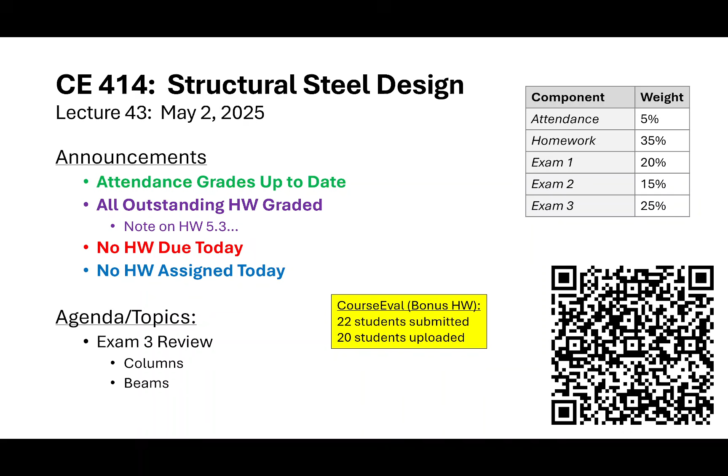Okay, so let's talk about the exam. You know how exam review works. I'm going to go through and talk about the format of the exam, what's going to be on it, and then the floor is yours for any Q&A you might have in getting ready for it.

So I don't have a whole lot to say that's different on logistics from our prior exams, because I want to make the point that this exam is not formatted really any differently than any of the others. In other words, just because I have a 2-hour time slot does not mean I made the exam a 2-hour exam, because I did not. It's really just another test. I have a very strong suspicion that an hour and a half in, most people will be gone.

That doesn't mean you have to be gone, you can stay the full 2 hours. But again, it's not intended to be a time-critical exam. You should have more than enough time to do the exam.

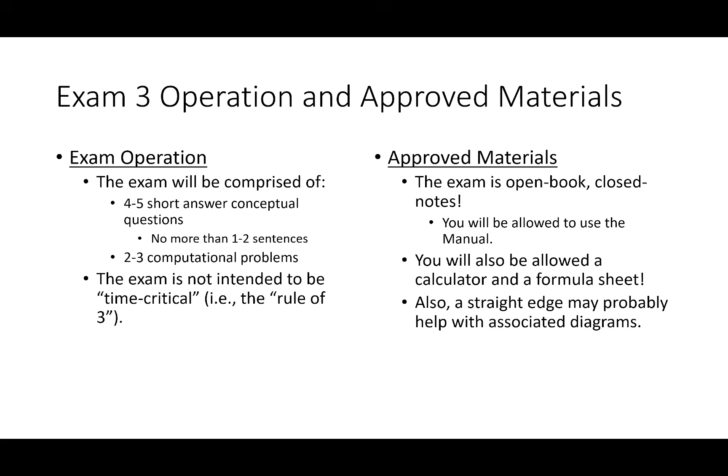It's open book, closed notes, just like all the other exams. You can bring the manual and bring a formula sheet, put whatever you want on it. I'm not going to take up the formula sheets, I'll look at them, but I want you to keep them, especially since it's the final, because I've given you back the formula sheets for the last 2 exams. I'll give you back this one as well. I'm keeping the exams, but you get the formula sheet back.

Let's talk about the topics on the exam. This is a columns exam and a beams exam, so the topics we've been discussing the past couple days are not going to be on it. Everything on columns and beams, and local buckling, is fair game.

For columns, make sure you understand the basics of how columns behave, the basics of buckling theory - elastic buckling, effective length factors. Why does elastic buckling not work? Or in other words, it's a useful parameter, but it's not good enough for computing column capacity because of the presence of geometric imperfections and residual stresses from the rolling process. Make sure you understand those ideas.

As for the crux of it, what you need to be able to do is analyze columns using either the AISC column curves from section E3 or table 4.1, specifically 4.1a because we're dealing with 50 KSI steel, and make sure you can select economical shapes using table 4.1. Remember, that table was how we would pick a shape and then verify its capacity using the column curves.

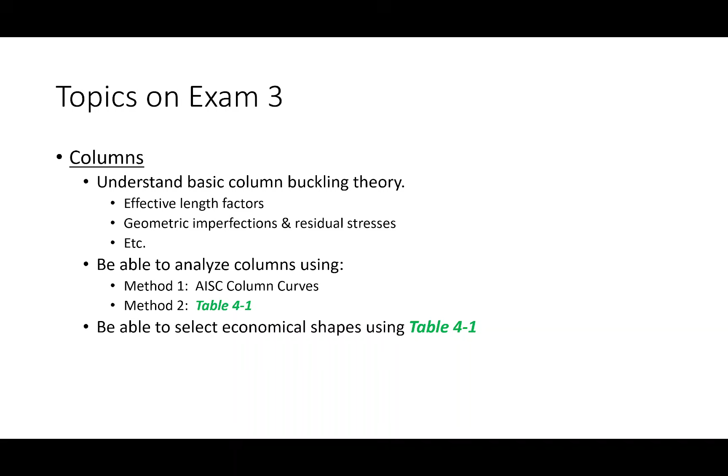For beams, it's sort of the same idea. Make sure you understand basic bending theory and basic beam buckling theory - things like what's the difference between the elastic neutral axis and the plastic neutral axis, what's the difference between, or what is ZX, what is MP, and what's this whole thing of lateral torsional buckling, and why do we apply this CB term to augment the capacity of a beam?

Remember, the idea is that the LTB differential equation solution assumes that moment is constant. We all know that in most practical applications, moment is not constant, so we have to adjust our solution accordingly, and we adjust that through this CB term.

Make sure that you can analyze and design beams. For analysis, analysis for shear is pretty much the same, and analysis for deflection is pretty much the same.

But for moments, it's a function of whether or not the beam is continuously braced or discretely braced. If it's continuously braced, the flexural capacity is phi Mp. If it's discretely braced, we've got to go to our flow chart and figure out what zone we're in: zone 1, zone 2, or zone 3.

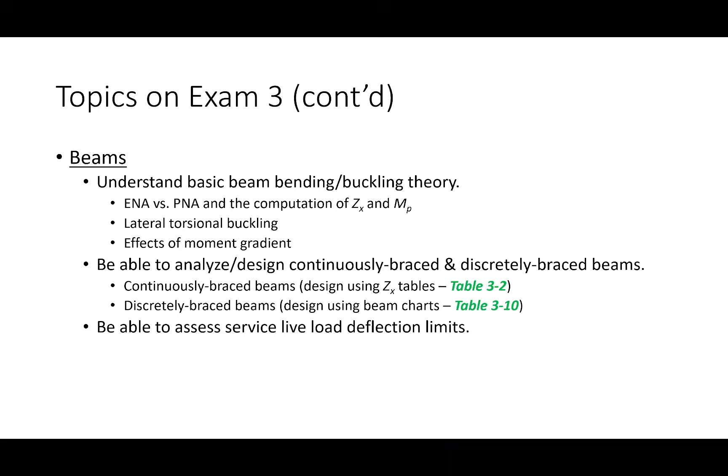In design mode, if we're designing continuously braced beams, we would use table 3.2. If we're designing discretely braced beams, we would use table 3.10. Now know that if you have a beam that, independent of all the moment stuff, is controlled by deflection, such as a live load deflection limit, we would use table 3.3 in order to select the beam. We would abandon all the beam charts and ZX charts and just use table 3.3.

That's the exam, that's what's on the exam. As for the stuff, the greatest hits over the past few lectures, well actually we're going back quite a bit. I mean this is almost like spring break.

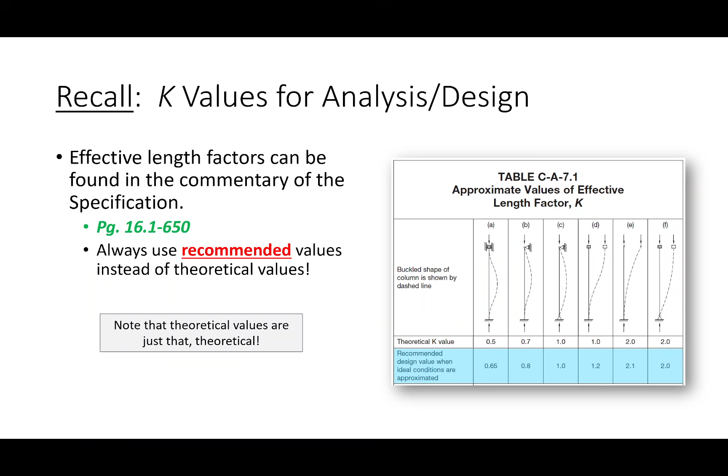So it's been a while since we've talked about some of this stuff. Recall that you're going to need to know how to navigate the chart to locate K values for analysis and design. Notice that we're using the recommended values, not the theoretical ones. By the way, this set of slides might also give you an understanding of what you ought to tab in your manual if you haven't already done so, like put a little bookmark in there.

All right, so column analysis using the raw equations from section E3. This is what I've been calling method 1. So what do we do? We determine the largest KL over R for the column. And remember, we get the K values from the previous slide.

Be careful when you're computing KL over R, especially with your units, because remember the length is measured in feet typically, but the R value is measured in inches, and KL over R is supposed to be unitless. So you need to multiply the length by 12 to get inches per inches and get a dimensionless quantity for slenderness.

Next thing we do is we compute F sub E. That's our elastic buckling stress, or our Euler buckling stress. And remember, that's the theoretical solution. Again, that's not the answer, but it's at least useful.

And what we do is we take that theoretical solution and plug it in here, because this AISC column curve, this expression for Fn, takes into account the presence of geometric imperfections and residual stresses. Now remember, with columns we have 2 zones of buckling.

We're either in inelastic buckling right here or elastic buckling right here, and that's a function of how our slenderness falls in comparison to this anchor point, 4.71 square root of E over Fy. If we're less than that, we're in inelastic buckling territory, and we use this exponential term for Fn.

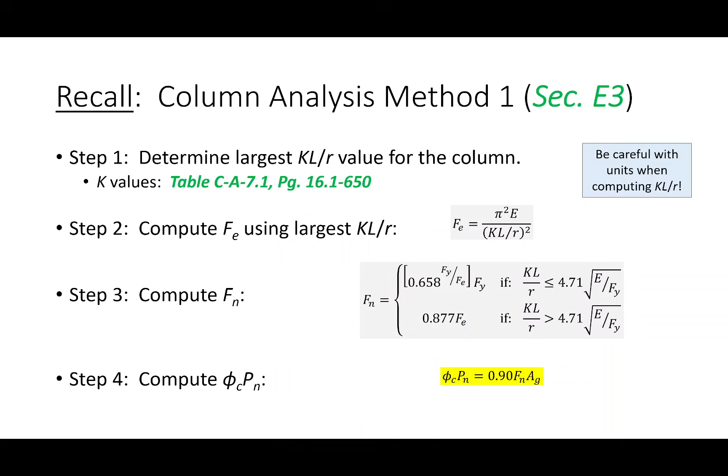Then once we get Fn, the axial capacity is 0.9 Fn Ag. Okay, method 2 is to use table 4.1.

The one disadvantage with table 4.1 is that it is by default written for weak axis buckling governing the behavior. Now if weak axis buckling does indeed govern the behavior, you can just look up the capacity. So if KLY is bigger than KLX for a W section, you know weak axis buckling governs. Just look up the capacity and move on.

But if KLX is bigger, you actually don't know whether strong axis buckling governs or weak axis buckling governs until you look at KL over R. The thing is, you don't need KL over R for this table.

You just need KL. So what you would do is, if KLX is bigger, you look at 2 quantities: you look at KLY and you look at your KL effective. And KL effective is just taking KLX and dividing it by this RX over RY ratio, and just look up the capacity based on whichever one of those 2 is larger.

Now there's a good chance that you're going to have to linearly interpolate the table, so make sure you're comfortable with linear interpolation.

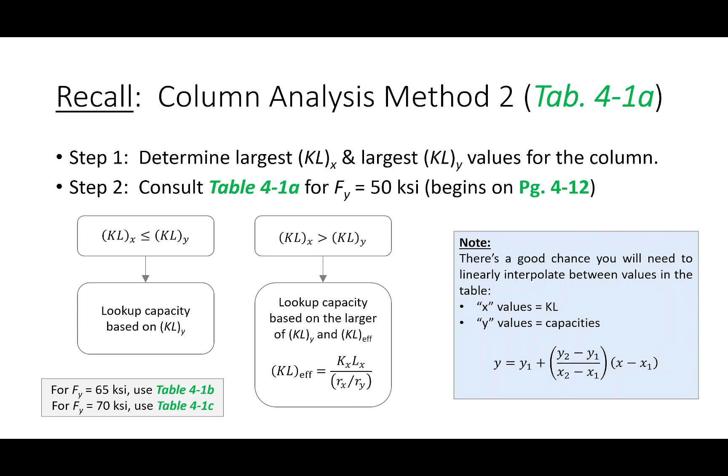And as for designing a column, we get our factored load, we determine the largest KLX and KLY for a column in question, and then we use KLY to select a group of trial shapes. Remember, we select...

We try and select at least one W8, W10, W12, W14. Know that it is possible that some of those sections might not be available, so if you have a pretty heavy load, you might find that there is no W8 that works. That's not an unreasonable thing that could happen.

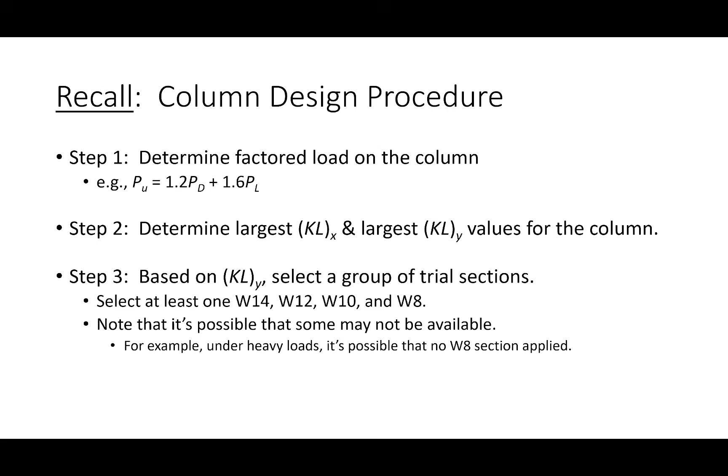For each one of those columns, you do need to assess whether or not they're actually valid solutions. Now this isn't all that necessary if KLY is bigger, just pick the lightest one, but if KLX is bigger, what you got to do is check each one of them, by checking against KL effective.

If I was on an exam, what I would do is I would take all my trial sections and organize them by weight and start vetting the lightest section first and then go from there. And as soon as I find a section that works, I know I picked the lightest answer and I stop.

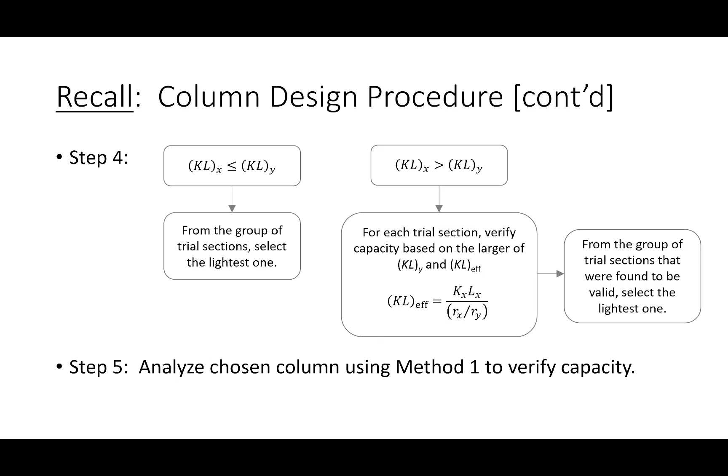But I do think it's a good idea to analyze that section using method 1 because you've done a lot of linear interpolation, a lot of guesswork maybe as it were. So actually going through and analyzing the section using method 1 is pretty important to make sure that all your math is correct. That's all we got for columns.

Let's talk about beams. So for beams, the first thing that we did is we discussed MP and this term ZX. The MP is the plastic moment. Remember, the idea is that as you take a section and you start increasing the amount of bending, the bending stress profile goes like this, and it keeps increasing until, bam, you hit Fy.

That's the yield moment. But if you keep increasing moment, what happens is that yielding will start to penetrate throughout the section. And when you get to the point where every cross-sectional fiber has reached Fy, now you're in MP land. Okay? Now the way that you compute MP is you take Fy and you multiply it by Zx.

And what is Zx? Zx is just the sum of the products of the areas of the cross-section times the centroidal distances. So remember what you do for Zx is the first thing you got to do is figure out where the plastic neutral axis is. That's the point where the area above equals the area below.

Sorry. You find the point where the area above equals the area below. We call that the plastic neutral axis.

Then you start summing moments of area. Area times moment arm. Area times moment arm. Area times moment arm. Until you sum those products up, and that's your ZX.

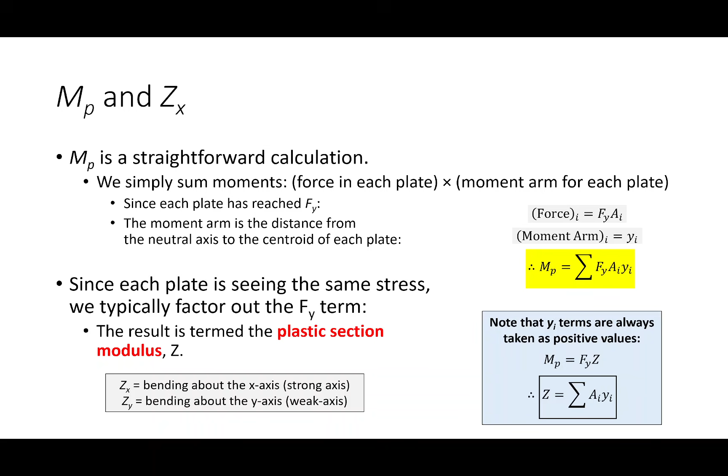Next, I've got all of the design aids that are relevant for beams. I would say probably the one we spent the most time with was table 3.2. That's probably the aid we spent probably the most time with this whole semester. We really referred to table 3.2 for weeks.

Table 3.2 has a lot of information baked into it. It's got the ZX, the φMp, φMr, BF, LP, LR, all that stuff. So whenever we're designing, what we would do is find our required φMp or our required ZX, but we would go up to the next bold row, and that's the one we would pick. That's because within each of those groups, the bold row is the one that's the lightest.

So for example, if you look at this upper group right here that's headed by the W21 by 55, all the sections below that are heavier than the W21 by 55. So if you needed a φMp, let's say a 450, you'd go, okay, 450, that'd probably be this section, but I might as well use that since it's lighter, okay? So that's kind of the idea there.

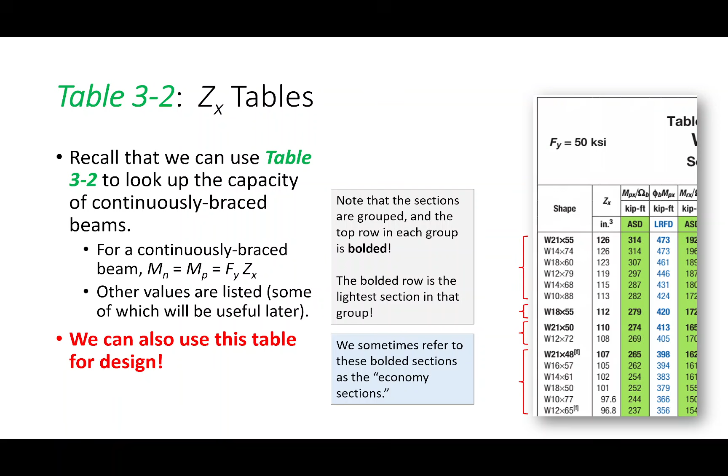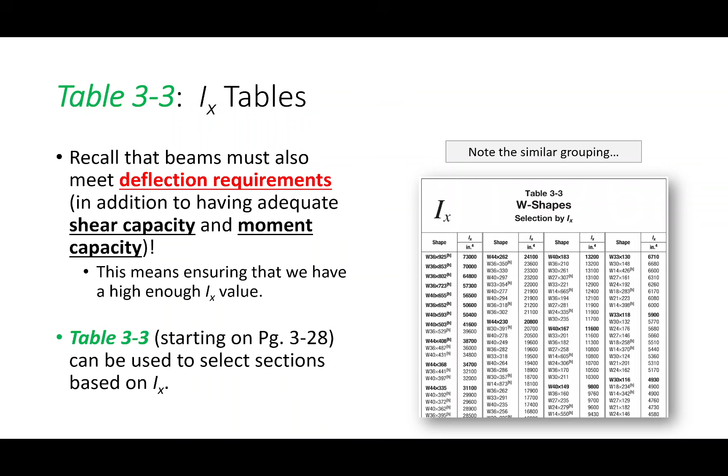If you have a section that's governed by deflection, in other words, you go through and you check the moment capacity, or you select a section based on moment capacity, it's no good. Abandon all the table 3.2 and 3.10 stuff and select a section based off table 3.3, which just organizes the shapes based on their moment of inertia, and you've got the similar grouping where the header row is the one that's bolded.

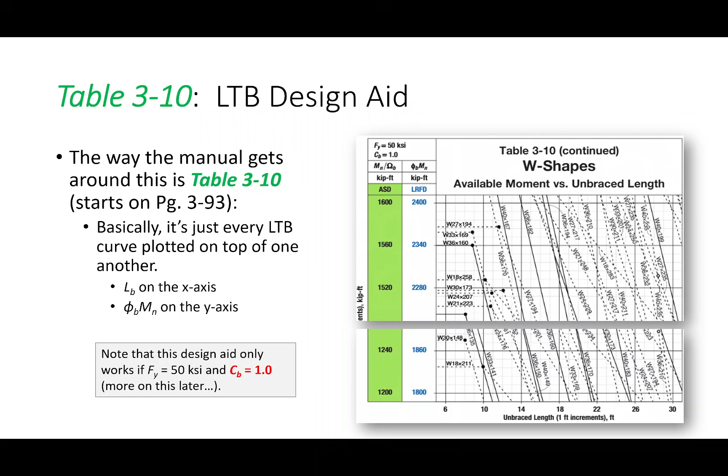Table 3.10, that's our LTB chart. That's the one where we go onto the x-axis with LB, and we go onto the y-axis with not MU, but MU divided by CB, okay? Because MU over CB is used because this chart is crafted based off a CB value of 1, okay?

And that goes into the process that we use for design, which I'll talk about here in a second. We designed 2 classes of beams in this class. We looked at continuously braced beams and we looked at discretely braced beams. Let's do the continuous case first. So remember, if you're dealing with a continuously braced beam, that means you have an LB value of 0, because that means the unbraced length is 0.

So what do we do? We compute our factored moment. If we're not given a beam self-weight, we should assume one. Common assumptions are anywhere from 50 to 100 pounds per foot. I will tell you on the exam, if you need to assume a beam self-weight, I'll tell you what it is, okay? Because I can have 30 assumptions and all of them are right, and so I don't have to do that.

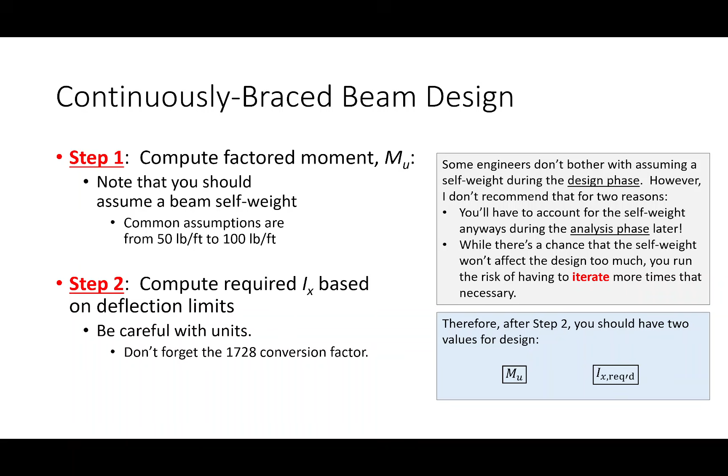The next thing that we'll do is we will compute the required moment of inertia based off our deflection limits. I should say that if we're not given deflection limits, we could just skip step 2. It's possible that you're told just design a beam with no deflection limits, so just don't worry about the required moment of inertia. Just select based off MU, okay? But assuming you've got deflection limits, you'll, after step 2, end up with a required factored moment that you need to withstand and a required moment of inertia that the beam needs to possess.

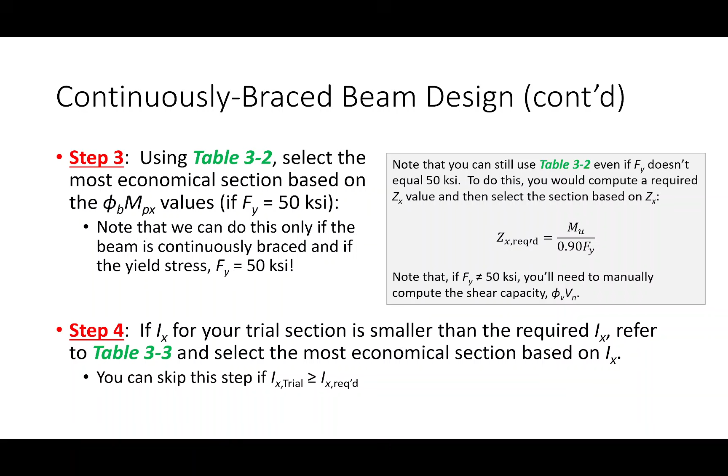So if it's a continuously braced beam, we'll go into table 3.2, pick the most economical section that we can find that has the required flexural capacity, and then make sure that that section has the requisite moment of inertia. If it doesn't have the requisite moment of inertia, skip table 3.2 and go to table 3.3 in order to select your section. Okay. Once you have a section, check your 3 limit states: moment, shear, and deflection. Moments are probably the ones that are most critical to assess, especially if the beam is heavier than what you assume.

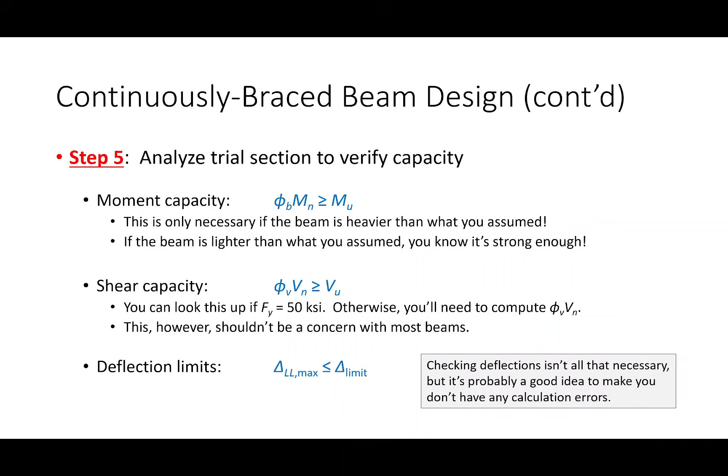Now for discretely braced beams, there's a couple other parameters we got to consider. Number 1 is our CB term. Remember, CB is the moment adjusting factor that accounts for the fact that when we derived our LTB solution, we assumed that moment is constant, but it's not in most practical applications. It's variable. So CB is a factor that accounts for moment gradient.

When you're computing CB, what you do is you have a CB for every unbraced segment. So if you had a beam with, I don't know, 11 braces, you'd have 10 segments, each with their own unique CB term, or potentially unique CB term. Within a given segment, what you got to find are 4 quantities.

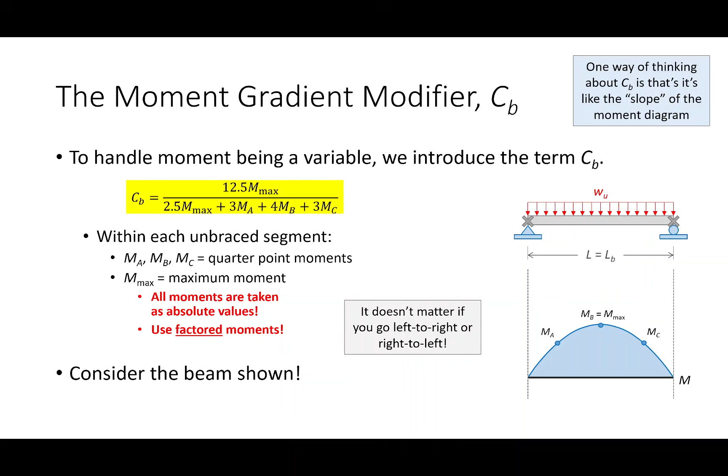We're in zone 1. That's a beam that's got oodles and oodles of lateral bracing, or enough lateral bracing that buckling isn't going to occur, and we don't need to consider LTB. And then our flexural capacity is just phi MP.

If we're in zone 2, which is the most common zone for most of the design problems we'll be dealing with, then our capacity is based on that linear expression as shown. That's just linear interpolation between phi MP and phi MR. And if we're in zone 3, we got to chug out our elastic buckling solution.

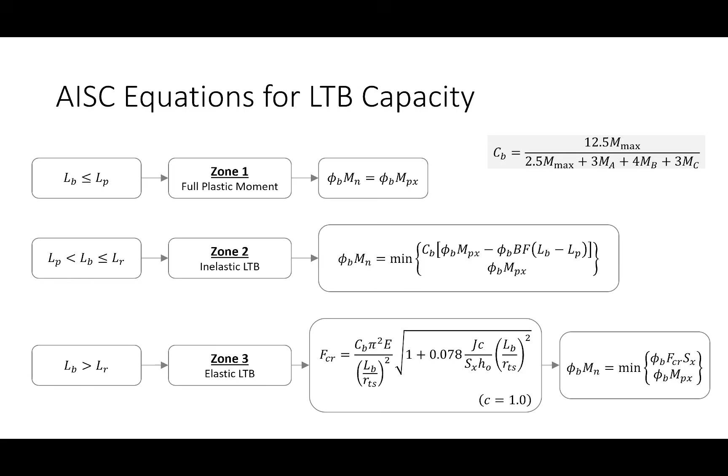For zone 2 and zone 3, there is a cutoff that no matter what you calculate, you're limited to phi MP. Because I don't care what you calculate, the maximum flexural capacity possible that we take according to the spec is phi MP. So that gets us into discretely braced beam design.

The process is very much the same for continuously braced beams as for discretely braced beams. You just have to calculate your CB term for discretely braced beams. So after step 2, we're not just going to have a moment and a required moment of inertia. We're also going to have this.

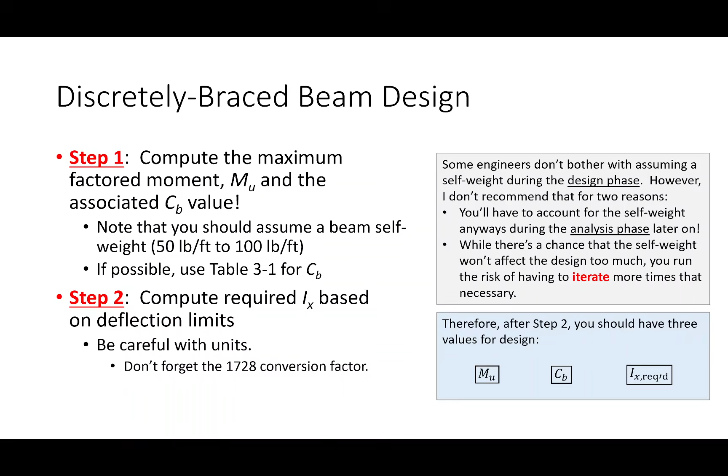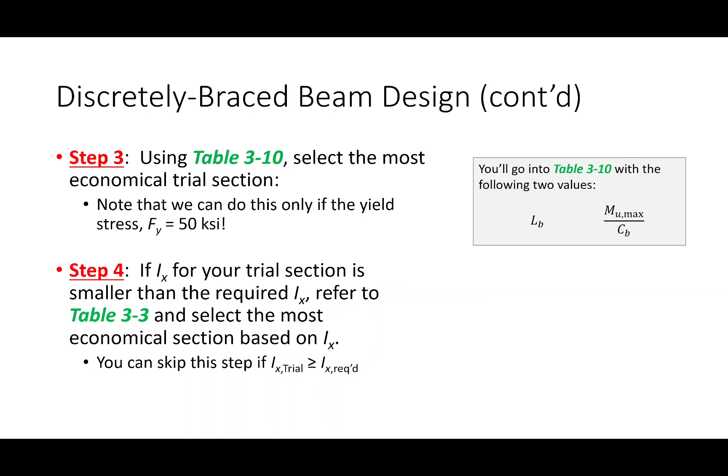The other thing that changes is that we go into the manual and go to a different chart. Instead of going to table 3.2, we go to the beam charts. That's where we have to divide out the effects of CB, because table 3-10 is based on a CB value of 1, and then analyze the section.

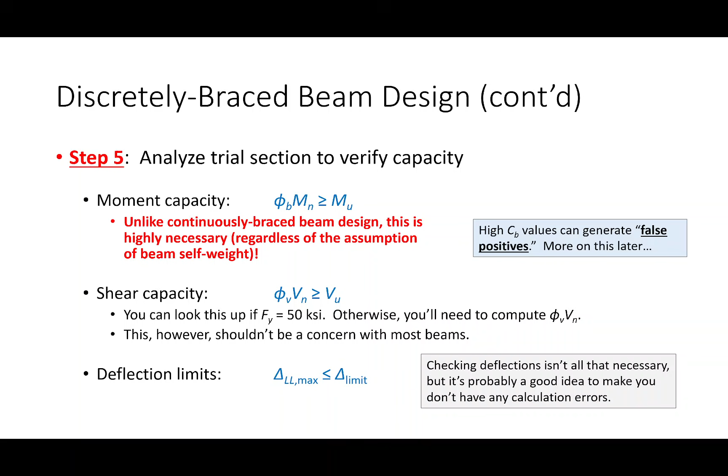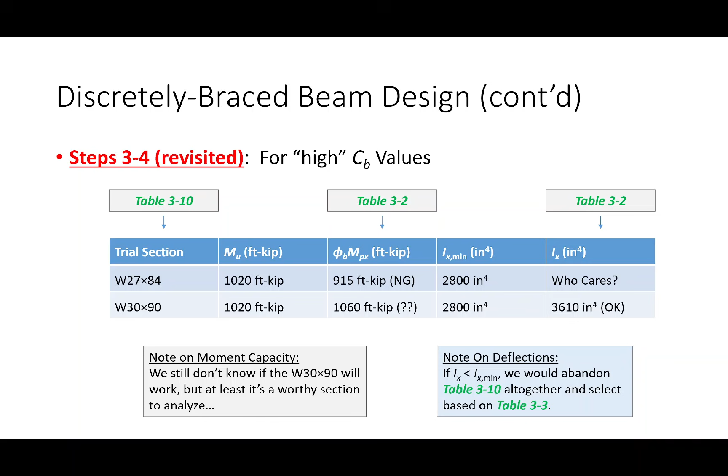In discretely braced beams, analyzing that section is incredibly necessary because of the idea of false positives. That's what happens when you have a really high CB value and you look up a section in 3-10, but it actually doesn't work, because if you check the phi MP, the CB term tended to artificially augment the capacity, and when the capacity is really limited to this, that section's no good. So you have to keep iterating, going to section or table 3-10 in order to find the section that works, and go from there.

That was a lot. I rattled off quite a bit.

Okay, we got about 30 minutes. The floor is yours. So any questions that you have about the pending final, which will be on Friday in the morning.

Everybody just cooked after this semester, just done. Here, Dr. Mike, this is a Thursday night problem. What are you talking about? You're too early, man. Again, we drew the short straw on the timing, so our finals are last. I can't do anything about that.

Any questions at all? Well, I got my words per minute down, I guess, after that. There will not be additional topics. They will not be included. No, I'm not going to put those on there. That was just cherries on top, just to cover it. Just because, yes. I have one short question.

When we calculate moment of inertia based on deflection limits, the answer we get is a minimum moment of inertia, right? Everything has to be higher than that? Yes. So when you calculate the required moment of inertia based on your deflection limits, and you get this IX required, that IX required is the floor value. So if you get a value of 856.3, you need to select a beam that has a moment of inertia bigger than that. Could be equal to that, but you're not going to find a moment of inertia equal to 856.3 in the manual because they're always whole numbers. So you're going to end up picking a beam that has a moment of inertia bigger than that. Remember, moment of inertia is a measure of the beam's flexural stiffness. If that value is really small, that means your beam is really flimsy. So what that calculation is saying is this is what it needs to be to meet this deflection limit. So if you're going to pick something, you're going to pick something that's at least that, if not stiffer.